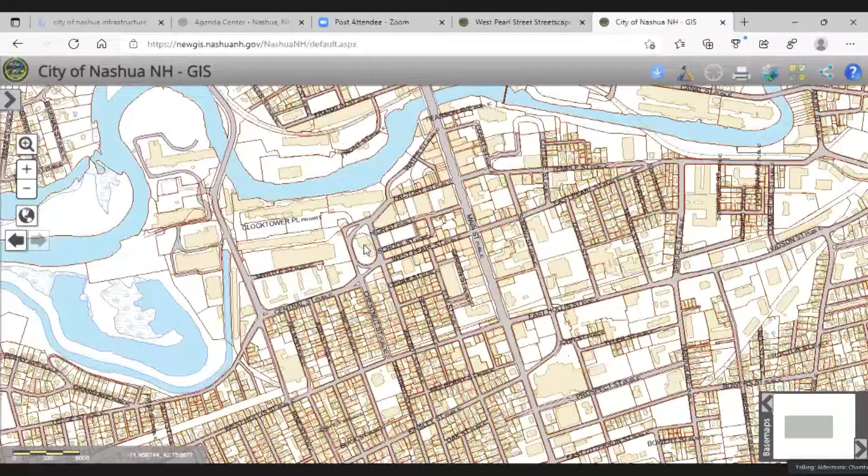Thank you. Director Cummings, I do have one little point. If you could just briefly explain to people that may or may not be familiar, with the oval smack in the middle of it, used to be municipal and county courthouse, but that's no longer the case, it's a private enterprise. Anything that we'll be doing as far as potential construction with the oval will be done on municipal property, correct?

Well, that's a good question, Alderman O'Brien. I'm going to zoom in a little bit here. I would say for the most part, you're correct. I would be remiss not to point out that over here, to do the straightening out of West Pearl Street, you're going to see potentially some little bit of encroachment on private property. This is Bob's Tires, owned by George Cadis. He's well aware of this project, so he knows that this may be a conversation that will come at some point. But to your point over here with this, yeah, this shouldn't be affecting anything.

We're going to actually assimilate the land, and in theory, if you wanted to, you'd create some development opportunity as you release the land from its current usage and provide a squared off rectangle for potential development. There's been conversations over here on the more northerly side about potentially putting in a parking lot, something we've asked our parking consultant to study. Then here on the southerly side, you might be able to put in a small development if the land was available after you got done with the infrastructure project. If you didn't want to do a parking lot, you'd have a much larger spot here if you wanted to do a development. But those are conversations we would need to have as time goes on.

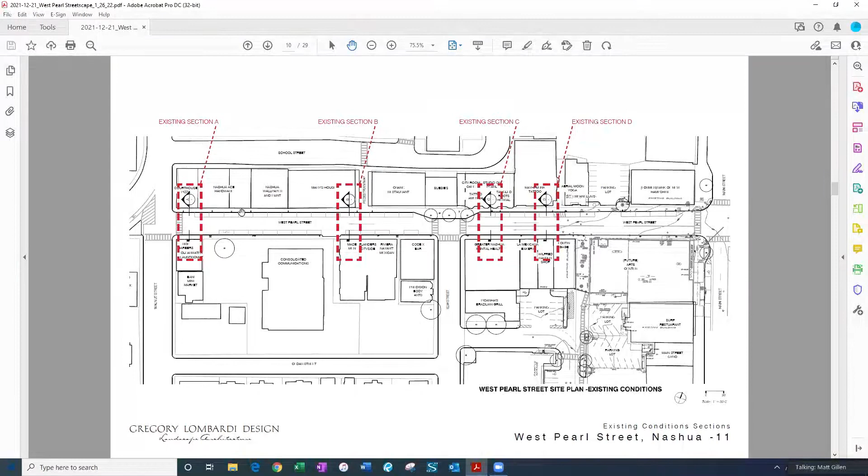I'll take you on a little sectional walk down the street. Each of these areas has a corresponding site section that cuts through the street and explains the different widths and the relationships between sidewalks and building fronts, all the way from Walnut down to Main — just four quick looks at the different streetscape conditions.

Here almost at the corner, at the intersection, the variation is pretty simple. You'll see variations in the widths of the north and south sidewalks — if you look at the 7'6" side and the 6'9" side, you'll see them grow and shrink. The building face is not even as you go down West Pearl; businesses come in and out of the sidewalk at different depths. That's one of the design criteria we're working on with RFS and the utility companies to help simplify things. The idea is that the curb line is what's consistent with the new design — we can't control the building faces as much as we'd like, but the curb we can set in a location that is consistent from east to west.

So you'll see here we have two travel lanes, a parking lane, and then as we slide down the street, the sidewalk gets a little wider — wider on the south side, a bit narrower on the north side. Again, two travel lanes and a parking condition. As we pull down in front of the bump-out, right about where Elm Street comes in, we have parking and two travel lanes, and further down West Pearl, again parking and two travel lanes. So there are conditions with consistent parking and consistent lanes, but the goal here is clear: the pedestrian isn't winning with the space we have.

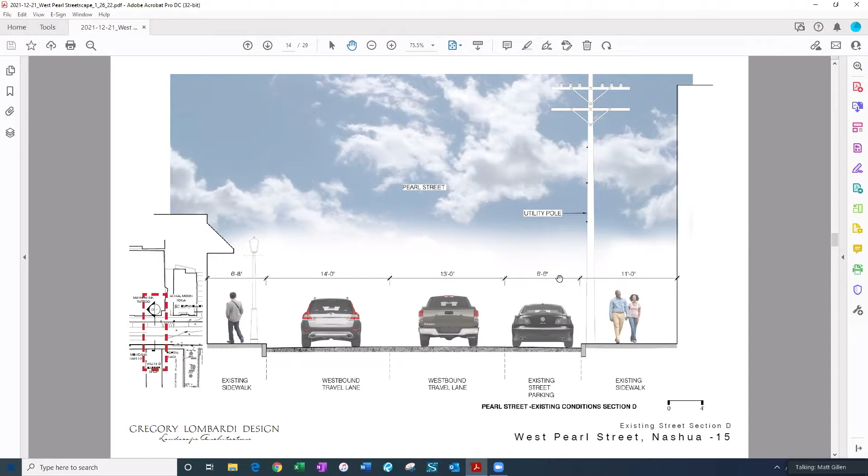We have a variation between 6 feet and 6 feet 9 inches on the south, and maybe 9 to 11 feet on the north. I think we can do a little better with what we're proposing for adding pedestrian value to the street.

So this is the concept we've worked through with the team. The idea is to consolidate parking into areas at both ends of West Pearl and provide more space for pedestrians to spill out into the sidewalk. The diagram is basically the same as the first: parking is indicated by blue stripes, trees are the small green dots spaced about 20 feet on center — we're still working on the spacing, which will depend on the existing utilities and how we work with them — and the yellow dots represent site lighting, giving a much higher frequency of street lighting down the length of the road.

Highlighted in red boxes are opportunities for things like public art, places where the public can engage with local artists who could come in during seasonal street festivals, where there's an opportunity for the public to actually fill these spaces, spend more time than just going back and forth to businesses, but actually create spaces for events.

And again, parking areas highlighted in blue, just to emphasize that there is a lot of adjacent parking, not necessarily on West Pearl, but very close by that is accessible for business owners. Down below, the recount is about 15 to 16 spaces, 24 pole lights, and 41 trees.

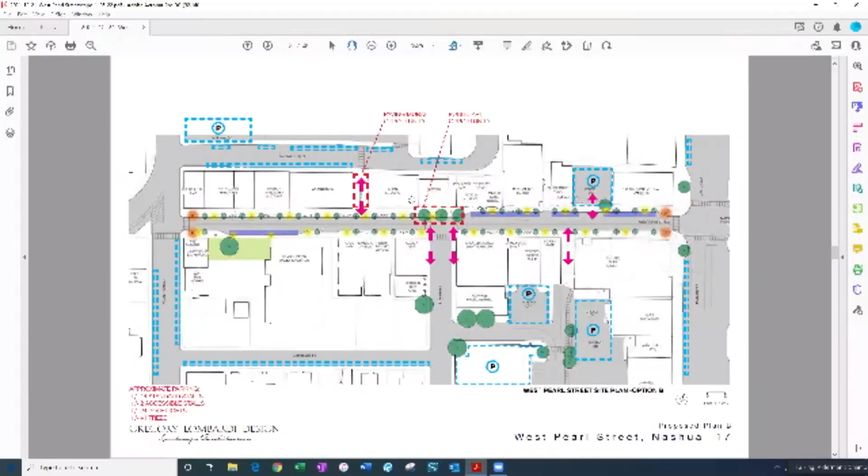First one I have is, I can't read what it says, but that arrow between the School Street development and Pearl Street, that's the Dick LaRose Memorial, and that had funding that took care of that walkway. Are we thinking of doing anything with that would require getting some permissions from the LaRose family?

Again, are you talking about between, see, right there? Yeah, just west of Cranes and St. Mary's house. We're not at that level of design yet. I think we haven't studied that to this point. So I can't say that we would be doing anything where we would need to get, because there's a memorial there, there's a mural there. I'm not sure how much they paid for the improvements, but...

So I think the intent is really just to identify where there may be opportunities for future development. Correct, okay, but not really part of the scope of the work.

So the trees that are going to be planted, when we did the trees on Main Street, one of the reasons we had to cut a lot of them down was because the root systems had totally messed up the infrastructure and gone into the buildings. So I would assume we'd be using small height trees with an enclosed root ball so the roots can't spread. Correct, they'd be in tree wells, and I'll show you a little more about the tree type, which is a columnar tree, kind of tall and skinny, so it doesn't get too wide in those locations.

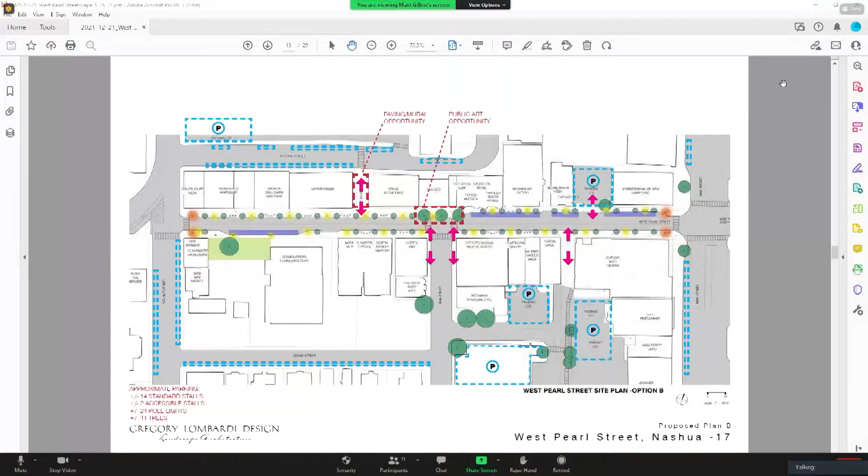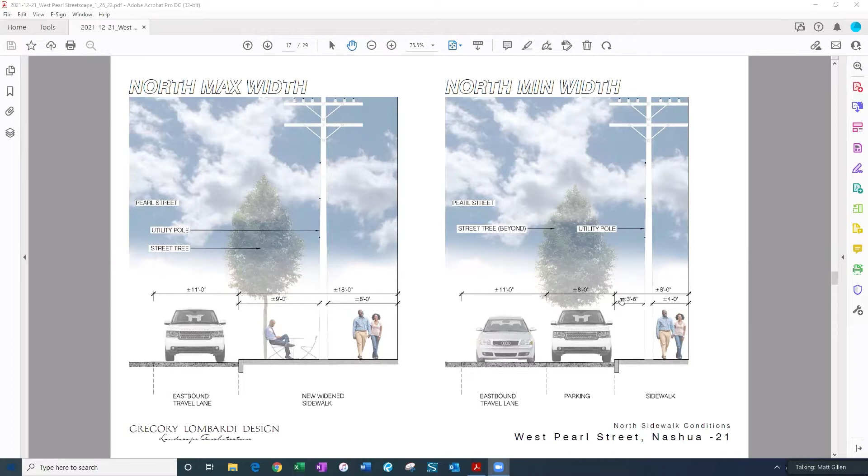The proposal here, as we look down the street, there are north and south conditions along the sidewalks that are minimum and maximum—kind of the worst and best case scenarios. Looking at the area on the north side, just by shifting the curb in, we can achieve some pedestrian space, what we call an amenity strip. That would include tree planting, as well as benches or areas for cafe tables and seating, while maintaining that 5-foot minimum distance between building face and those zones. There are locations along the north sidewalk with potentially some tight spots, but we're keeping an eye on those areas to make sure we still have minimum passable widths—around 4 feet where there's a utility pole. Overall the widths will be much wider than they are now.

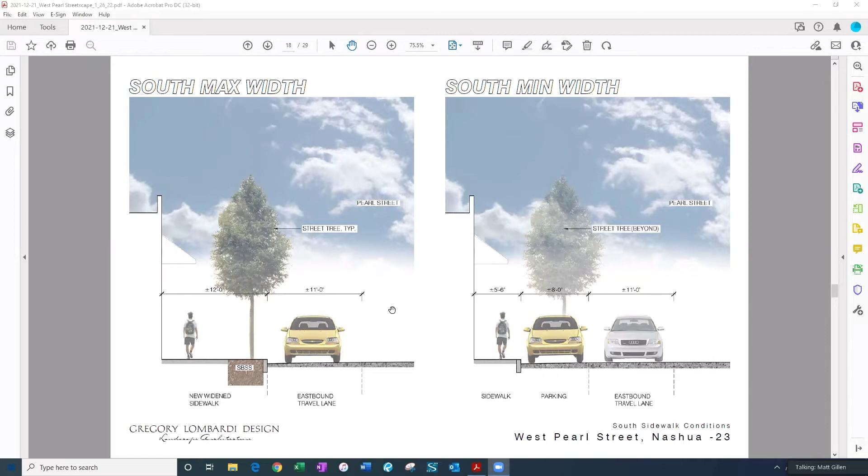Looking at the south side, minimum and maximum—it's a bit of a different condition, getting down a little skinnier, plus or minus 5 feet 6, with the parking and travel lane included. Here in sections showing a street tree condition: the street trees will be placed to avoid the utility pole locations, which are on the north side. On the south side, the street trees will be placed so that cars can still pull up and open doors if people need to jump out, so they'll be set back from the curb face enough that that's not a problem. So a bit of an improvement here, shrinking the travel lane a little and expanding the sidewalk condition for those amenity areas.

And then I'd just like to look at some plans that show those widths and the different things we can fit into those zones. Two different possibilities for tree pits. Again, to the concern about trees impinging on utilities, the trees will be put in dedicated locations and carefully examined with existing utilities to make sure there aren't any future issues.

Same thing with looking at the paving for the sidewalk. We want to make sure there's no heaving, or it's kept to a minimum, inside the tree pit with the tree grate. There are two different ways to handle tree pits. Here you see a raised condition, a curbed condition, and then in the amenity zone, a potential granite curb, a brick edge - and I know there's been mixed success with the brick edge in the city, so we're looking at that as an option.

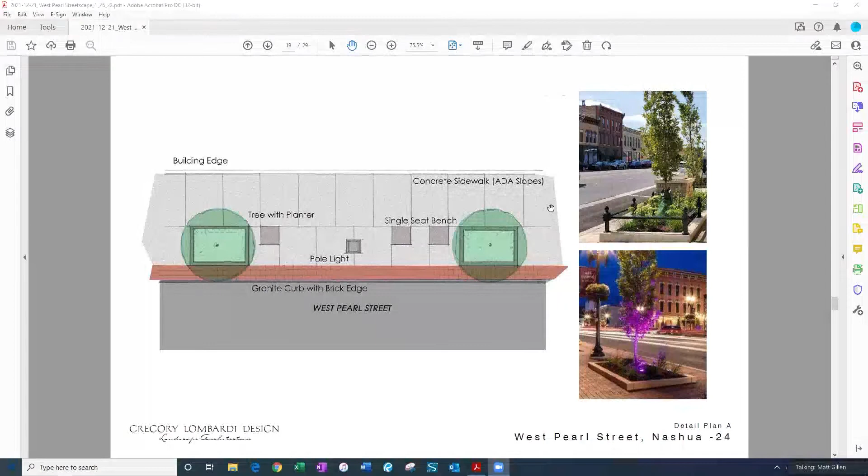And then there are opportunities in this strip with the trees for amenities like single seat benches and lighting. The other way to handle tree locations is with a flush condition, which is sometimes easier with snow removal because you're not bumping into a curb with a shovel. This is definitely easier to keep the plants healthy, I would say. This condition, the tree grate, is a bit more limiting with what you can plant in those zones - it's pretty much kept to a tree, with no additional shrubs or perennials planted there because of traffic and circulation.

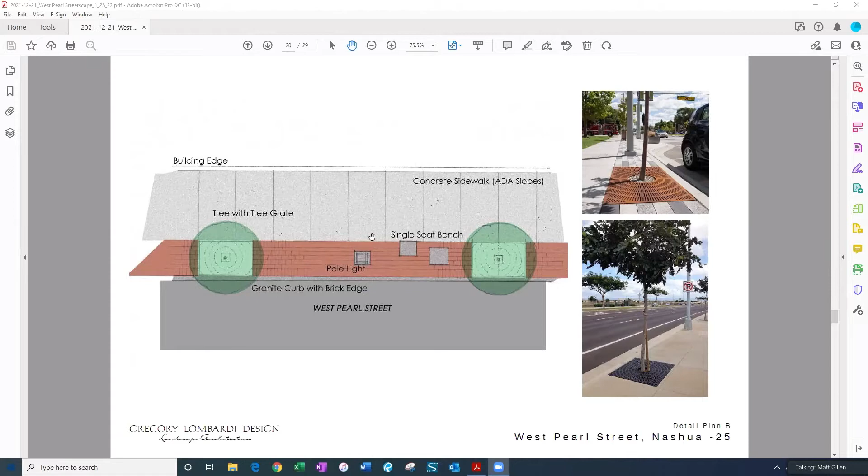So these are flush conditions, much easier to maintain. Again, different ways we can handle identifying the amenity zone, either through a smaller strip of brick or something a little wider that would delineate that zone differently. The reason we do that is twofold: to break up the monotony of a very wide concrete sidewalk, and also to give it an identity so people know they're stepping out of the travel lane and into the amenity zone.

And then just looking at some ways we could accommodate site furnishing. These are two quick scenarios showing different setups. So if there's a restaurant or cafe that would like to put seating out, this amenity zone, which averages around 6 to 8 feet, could accommodate some different scenarios, some stand-up tables, while maintaining that very important passable zone between the building face and the amenity strip, at a 5 or 6 foot minimum as requested.

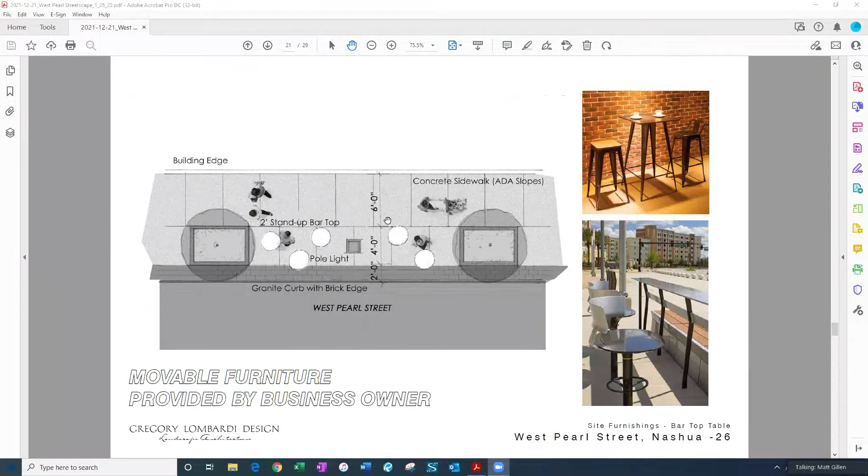And then if you wanted to look at more standard cafe seating, tables and chairs instead of a stand-up condition, they're a little more space consumptive in terms of size, but they would still work with those conditions.

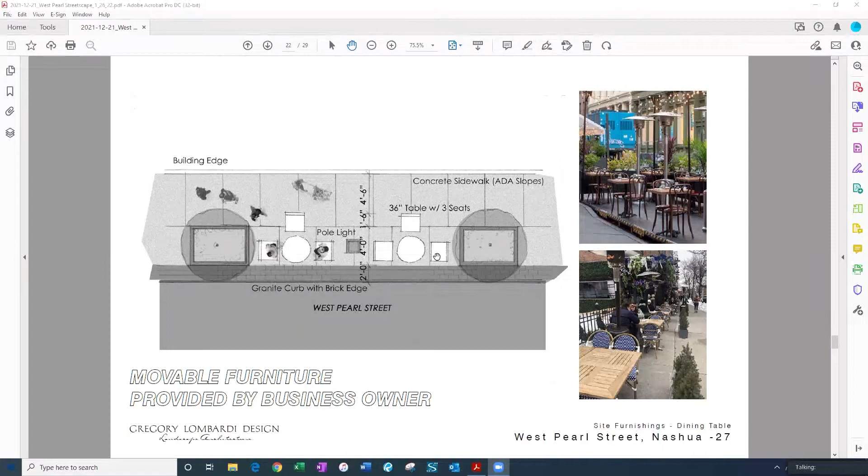And then just a little more about the trees. We're talking about what's called a columnar tree or fastigiate tree that stays more narrow in form. The reason we use these trees is both to avoid potential conflicts with utility poles and overhead wires, and also to avoid the tree projecting into the street. I know there's a lot of commercial traffic up and down the street, with bus circulation and delivery vehicles that have the potential to clip the trees and make them a maintenance problem. But the goal with columnar trees is that they don't extend too far into the street envelope.

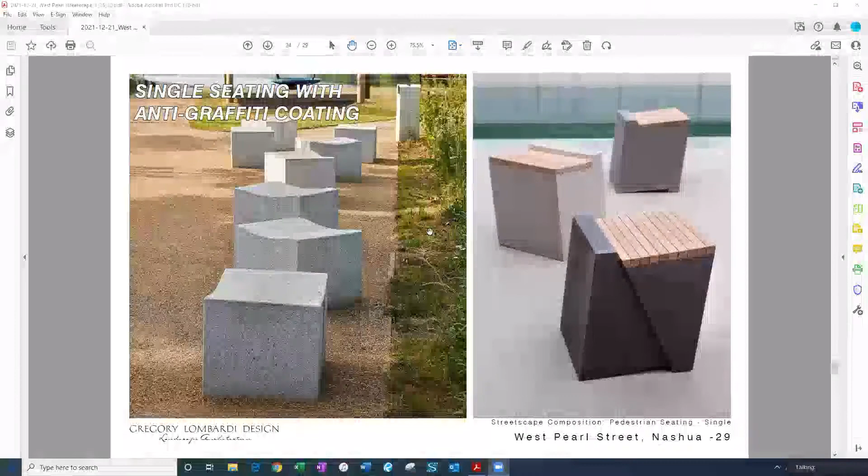And then again, some very heavy seating so we don't have to worry about things moving or walking away when we're not around. We're looking at seating more appropriate for single use instead of longer benches that can encourage people to stay longer. These would be interspersed in that amenity zone depending on the use desired in front of each business. But the goal is that they're very heavy and accommodate a single person to sit, or sit and wait while someone might be shopping in the store, but not long-term seating opportunities.

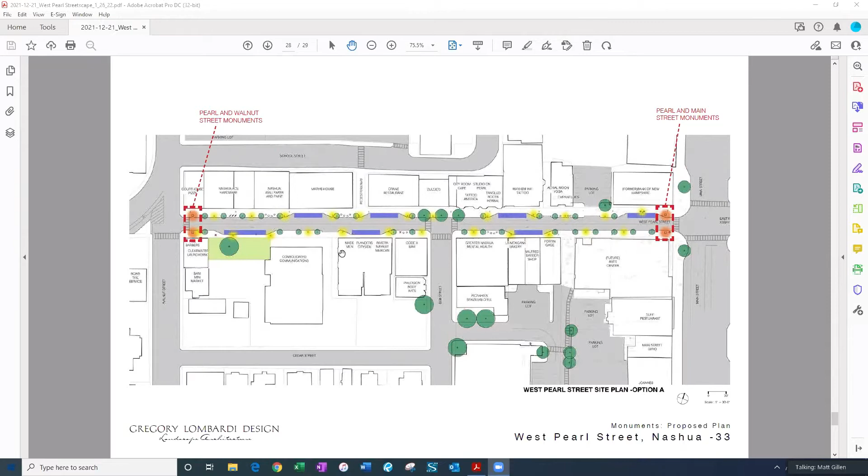One idea we had for lending identity to the street would be creating two gateways on either end, as a way of almost bookending the streetscape design itself. These two areas on Pearl and Walnut and Pearl and Main could be marked in some way with either a bollard or an illuminated column, announcing this specific district to the town.

So I think that's most of it. I don't know if there are any questions for me specifically about parking, or anything for Tim about next steps — we can happily chat through any of that.

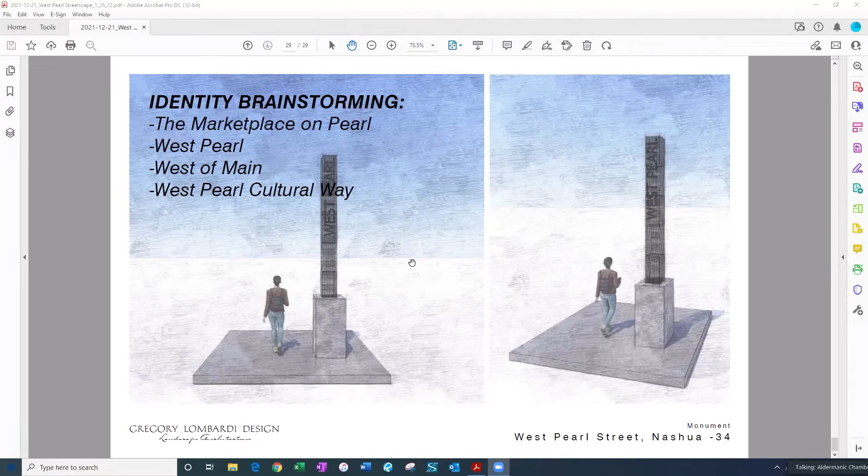Just want to end the conversation and the formal remarks by making sure this body knows that this wasn't developed in isolation. There were many conversations that led up to this proposal. I believe the design team walked the West Pearl Street area in the early fall, and I believe Mr. Lannon joined them on that walk and spoke to a lot of the business owners and abutters along the streetscape.

We held a community meeting where we invited abutters and local stakeholders who would have an interest in this, to preview the presentation and solicit their comments and feedback. We've also incorporated a lot of department and city notes into the presentation, all while this being a public presentation where we'd very much look forward to hearing your feedback, but also want to get the feedback of the general public as we continue to design.

But what we're really looking for today is guidance as to whether we're heading in the right direction. We have some constraints that we need to work through, and we're trying to balance it to give everyone as much of what they want. That is very difficult because there are a lot of competing interests, but I think the proposal and plan you just saw makes it very clear we did our best effort to accommodate everyone's wishes and sentiments thus far.